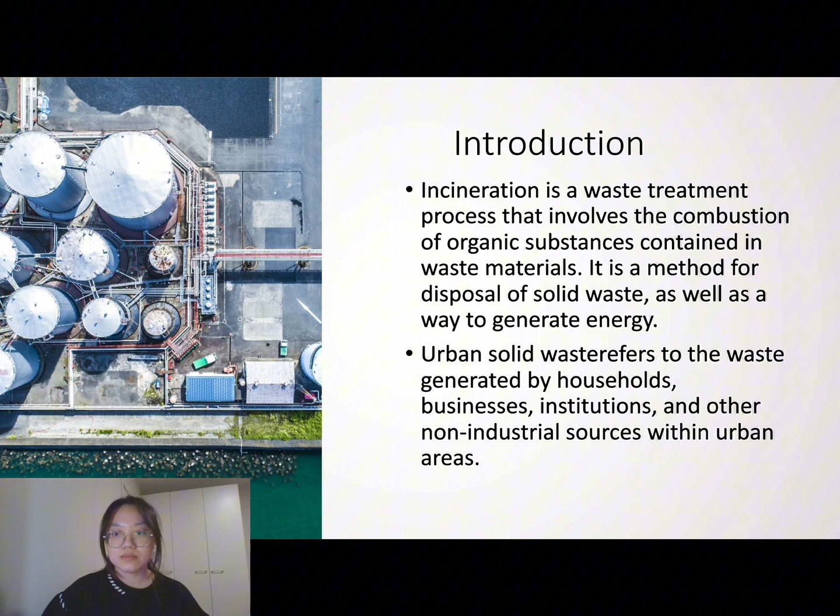After collecting urban solid waste through various channels, recyclable and harmful waste are separated, and the remaining waste is transported to the incineration treatment site. Before incineration, further treatment such as crushing is carried out to optimize combustion and improve energy recovery efficiency.

Sufficient combustion is carried out in the incinerator, and the generated heat heats the water in the boiler to produce high-pressure steam. The steam is then directed to the turbine to generate electricity using its rotational energy. Some facilities can capture and recover additional heat from the flue gas, which can be used for regional heating or

other industrial applications. The pollutants generated during the incineration process will also be captured and treated. The remaining non-combustible materials after incineration will also be further treated or buried in landfills.

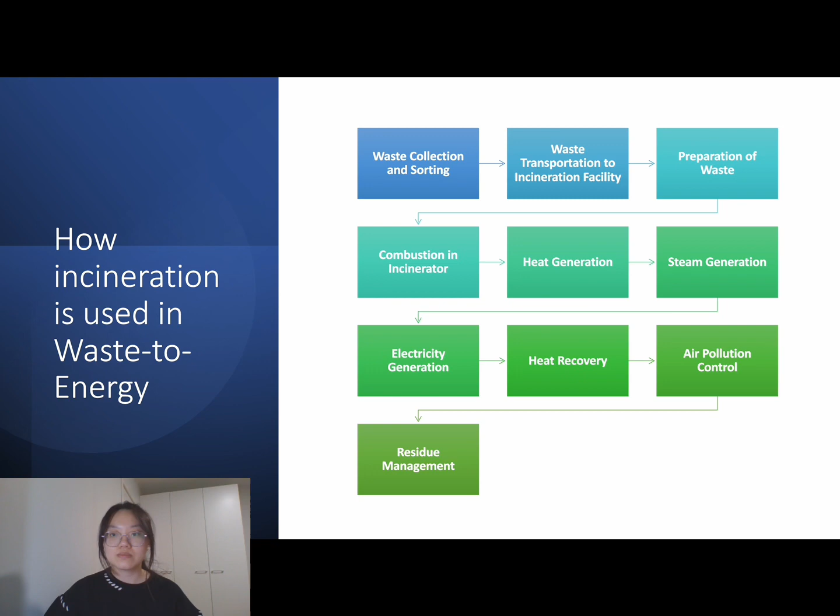The impact of incineration technology on waste recovery rate is complex and depends on specific circumstances. If waste incineration is considered the main method of waste treatment, then recycling may not be given as much importance. If a large portion of the waste is directly incinerated, the materials available for recycling programs may be reduced. The government's policies and investments in waste management infrastructure will also affect the balance between incineration and recycling.

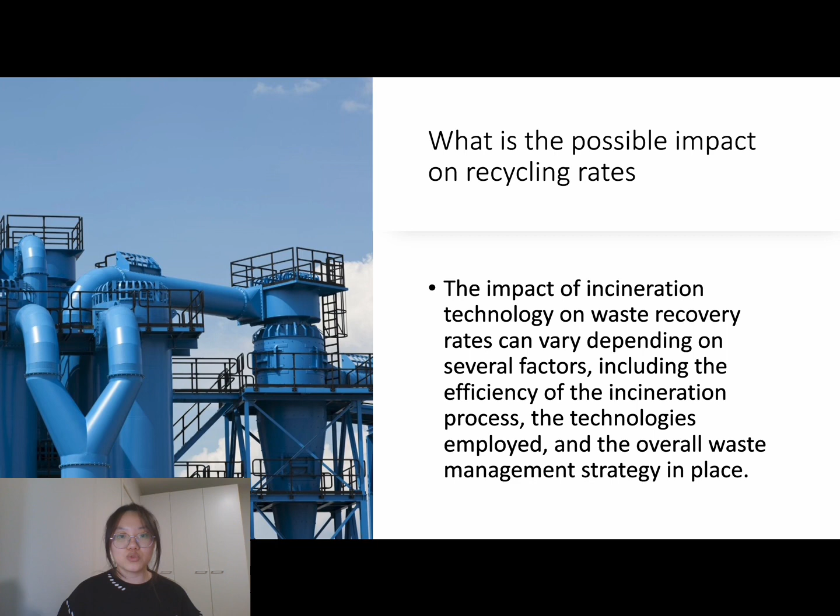Incineration technology has a wide range of applications and can be applied to various types of waste. Incineration is a common method for managing urban household waste, as it reduces the volume of waste, minimizes the demand for landfill space, and can generate energy. The combustion of biomass can generate heat and electricity, and the resulting ash may have agricultural applications.

It can be used for safe disposal of contaminated waste from hospitals or labs. It can be used to incinerate harmless industrial waste such as paper and wood. It can be used to handle certain types of hazardous waste, such as waste oil and solvents. The sludge from sewage treatment plants can be incinerated to reduce its volume and generate energy.

Although traditional incineration may not be suitable for e-waste, as it releases potentially harmful substances, some advanced technologies, such as waste incineration with integrated gas cleaning system, can be used to manage certain components of e-waste.

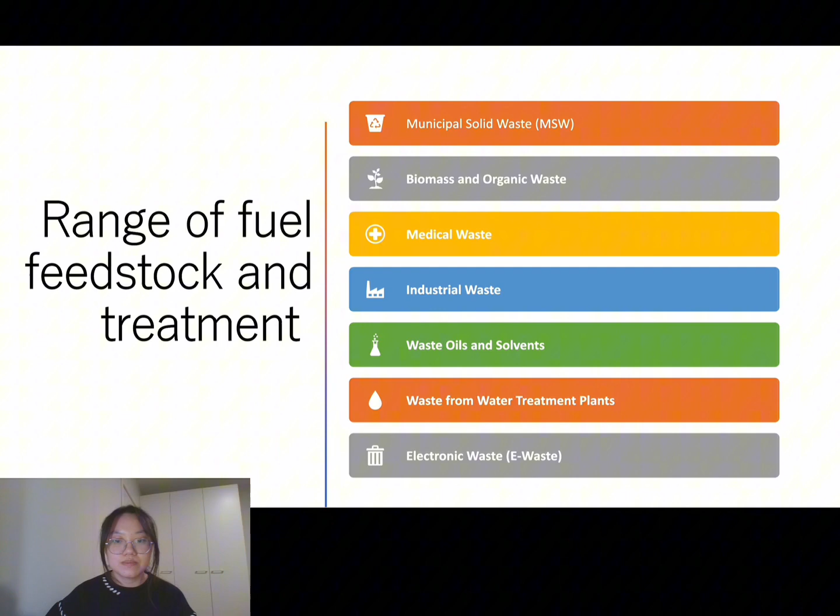The selection of boiler technology during the incineration process is a complex decision that requires consideration of specific waste characteristics, regulatory requirements, energy recovery goals, and environmental factors. There are many different types of boilers, each with its own advantages and applications, and we should choose the most suitable type according to its requirements.

In the context of waste incineration, boiler technology plays a crucial role in converting the heat generated by waste combustion into steam. The higher the efficiency of steam generation, the higher the energy recovery rate. Then steam can be used for power generation or to provide heat for industrial purposes.

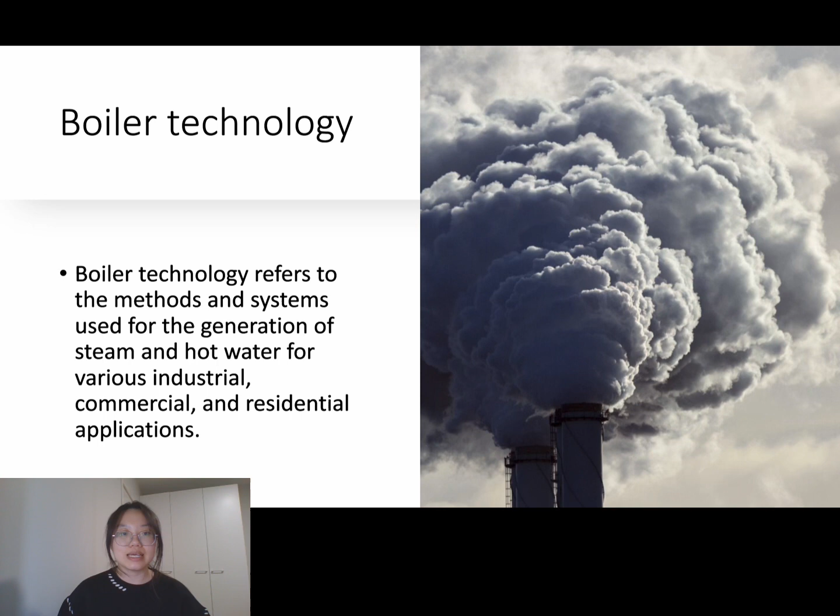Then we are going to talk about the challenges and solutions for emission control. Here are 3 points about the challenges. Firstly, the emission of harmful substances such as dioxins during the incineration process is difficult to control and poses a threat to the environment and human health.

Secondly, the control of parameters such as temperature, oxygen concentration, and incineration time during the incineration process is difficult and requires high-level technical and equipment support. Last one, both exhaust gas treatment and waste residue treatment during the incineration process require a lot of energy and capital, resulting in high costs.

The current solutions to these challenges mainly include the following: adopting advanced combustion technologies such as high-temperature combustion and low-nitrogen combustion to control parameters such as temperature and oxygen concentration during the incineration process, reducing the production and emission of harmful substances.

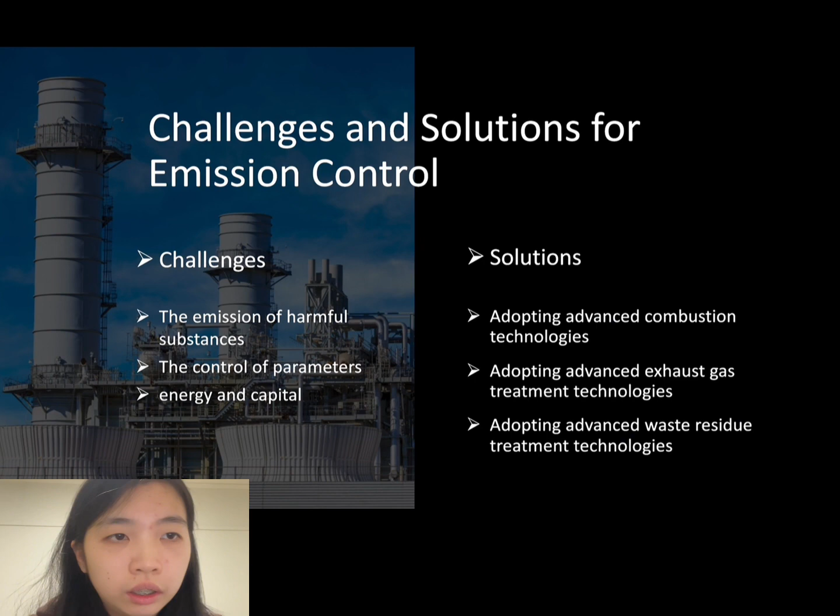Then adopting advanced exhaust gas treatment technologies such as activated carbon adsorption and catalytic oxidation to treat harmful substances generated during the incineration process, reducing their impact on the environment. Then adopting advanced waste residue treatment technologies such as solidification and stabilization to treat waste residue generated during the incineration process, reducing their impact on the environment.

Next, about the waste disposal. The main method of waste disposal of ash includes solidification and stabilization techniques. Solidification involves mixing the waste residue with a solidifying agent to form a hard solid under the action of the solidifying agent, reducing the volume and stabilizing and rendering the waste harmless.

Stabilization involves adding chemical agents or physical methods to convert the harmful substances in the waste residue into stable compounds, reducing the release of harmful substances and stabilizing them. The treatment of byproducts after waste disposal mainly includes resource utilization. For example, ash can be used to produce building materials such as cement and concrete and can also be used for road construction.

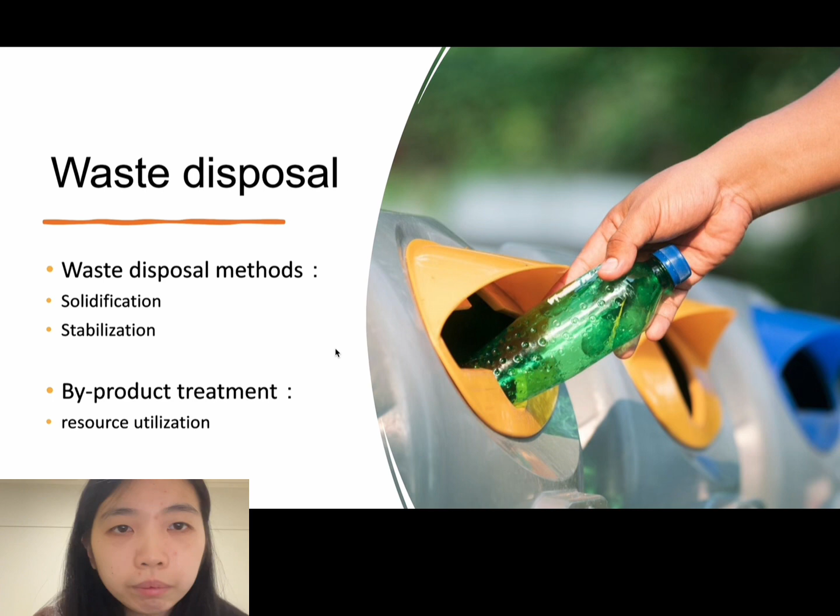The importance of waste classification lies in its ability to help us better manage and dispose of waste, reduce environmental pollution, and improve resource utilization. Two main waste categories can be established based on the distinct legislation and policy instruments usually in place: non-hazardous or solid waste, and hazardous waste.

Non-hazardous is all waste which has not been classified as hazardous: paper, plastics, glass, metal and beverage cans, organic waste, etc. While not hazardous, solid waste can have severe environmental and health impacts if left uncollected and untreated. Hazardous waste is waste that has been identified as potentially causing harm to the environment and human health, and therefore needs special, separate treatment and handling.

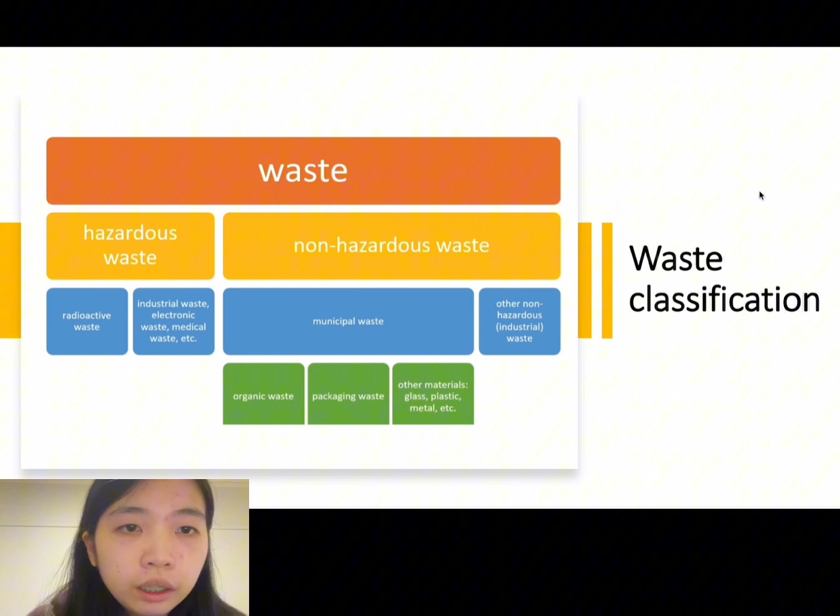E-waste is generally classified as hazardous because it contains toxic components. Medical waste can be infectious, toxic, or radioactive, or contain bacteria and harmful microorganisms. Radioactive waste contains radioactive materials, so it is all hazardous waste. We know the principles of garbage disposal are harmlessness, reduction and resource utilization.

The main methods of harmless treatment of domestic waste in various countries around the world include landfill, composting, and incineration. Among them, domestic waste incineration power generation is a new technology developed in the past 30 years. Compared with landfilling, it can save a lot of land resources, reduce possible secondary pollution, and convert waste into energy resources. It has therefore increasingly become the main method of waste disposal in some developed countries.

Among the harmless treatment methods of domestic waste, waste incineration power generation has the advantages of saving space, significant reduction, more thorough harmless treatment, and conversion into energy. It has attracted more and more countries' attention. The proportion of waste incineration power generation is increasing year by year, and it will become an important direction of new energy development in the future.

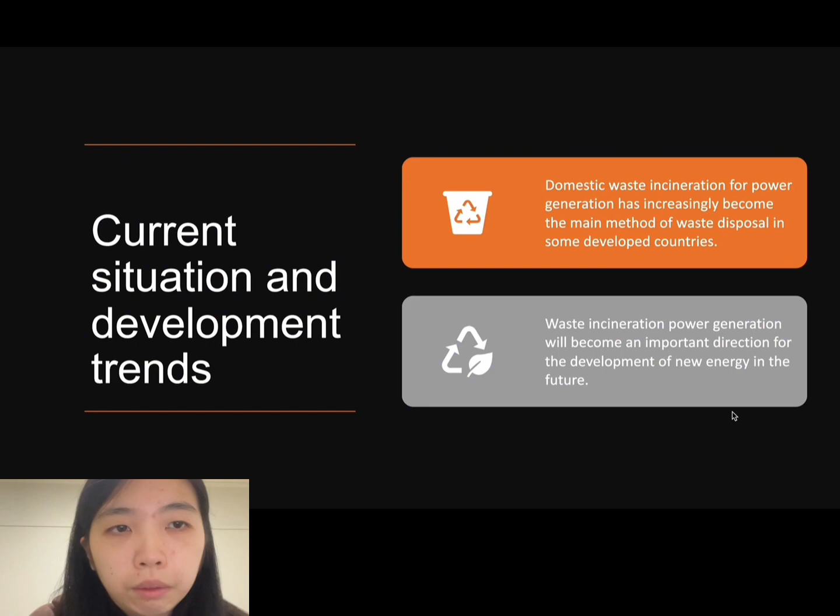The efficiency of energy recovery and incineration technologies for power generation is also an issue that deserves our attention. There are a huge number of factors that can affect it, and I have listed some of them. First of all, the moisture content of waste. Waste with high moisture content consumes more energy when burned. It will reduce combustion efficiency.

And the choice of fuel and its degree of combustion. The more fully the fuel is burned, the more efficiency it will produce. The choice of fuel is also critical, and if the fuel chosen contains a high level of contaminants, the operation of the generator will also be impacted. Exhaust gas treatment systems.

Effective exhaust gas treatment systems can reduce emission levels and improve energy recovery efficiency. The above 3 points are mainly in the incineration process, and the recycling of waste residues after incineration can further improve the energy recovery rate, which is also a point that should not be ignored.

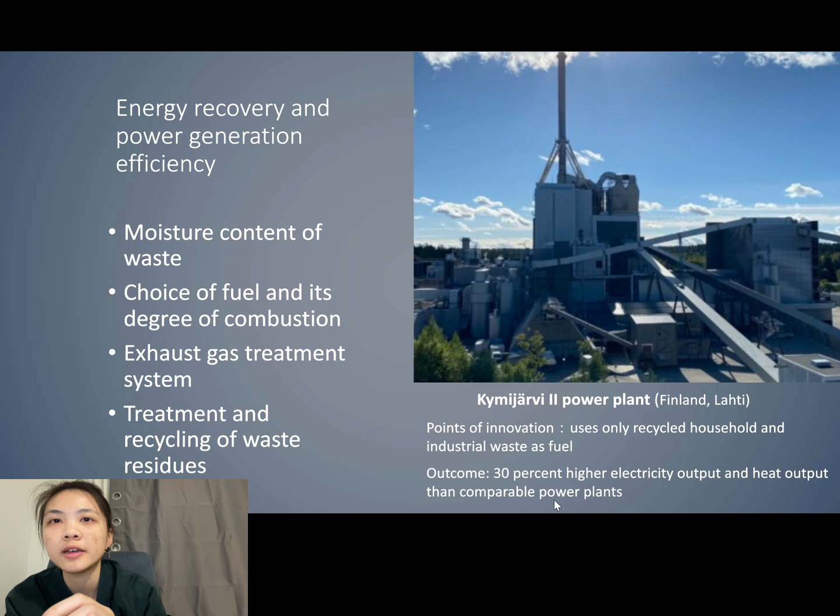To improve efficiency and be more environmentally friendly, factories can improve their technology in 3 ways. To start with, enhance waste pre-treatment technologies. Industry can remove the impurities in the waste in advance that may cause harm to the equipment. Then, during the process of incineration, some intelligent control system can be used for more precise controls to improve efficiency.

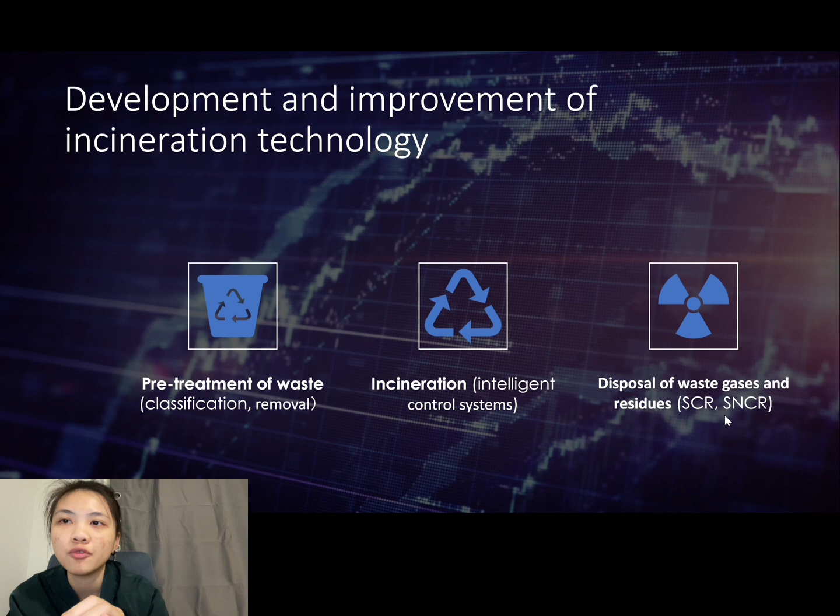After incineration, proper disposal of waste gases and residues can be used to reduce the influence on the environment, such as SCR and SNCR, which are both able to reduce the emission of nitrogen oxide.

It cannot be ignored that incineration also has a certain impact on the environment. We can explore its impact from 3 aspects: social, environmental, and economic. First, we start with the environmental side. There will be air pollutant emissions and the generation of waste residues in the incineration process. This will affect air quality, and it will also cause water contamination due to improper disposal. So, it is not in line with SDG 6, clean water and sanitation.

At the same time, the incineration process is fueled by several organic wastes that are renewable energy sources, in favor of SDG 7, affordable and clean energy, which aims to reduce dependence on non-renewable energy sources.

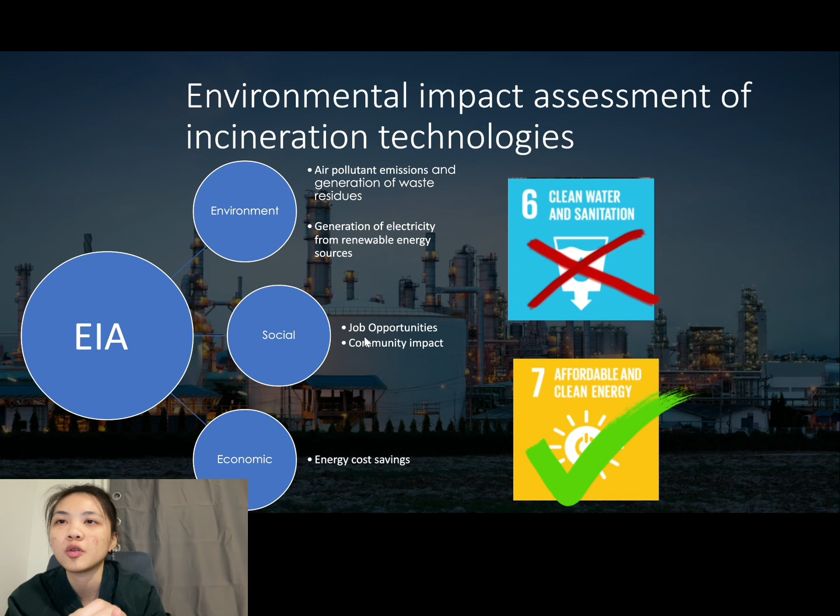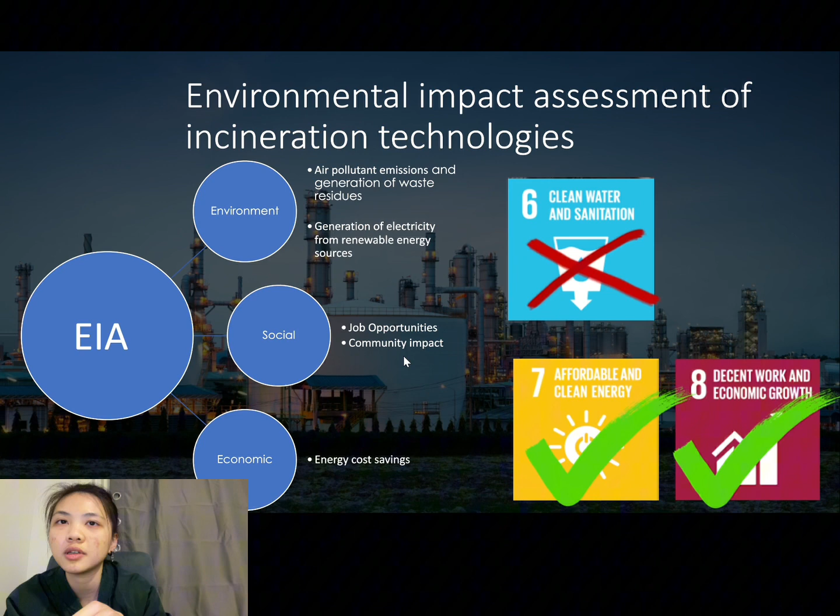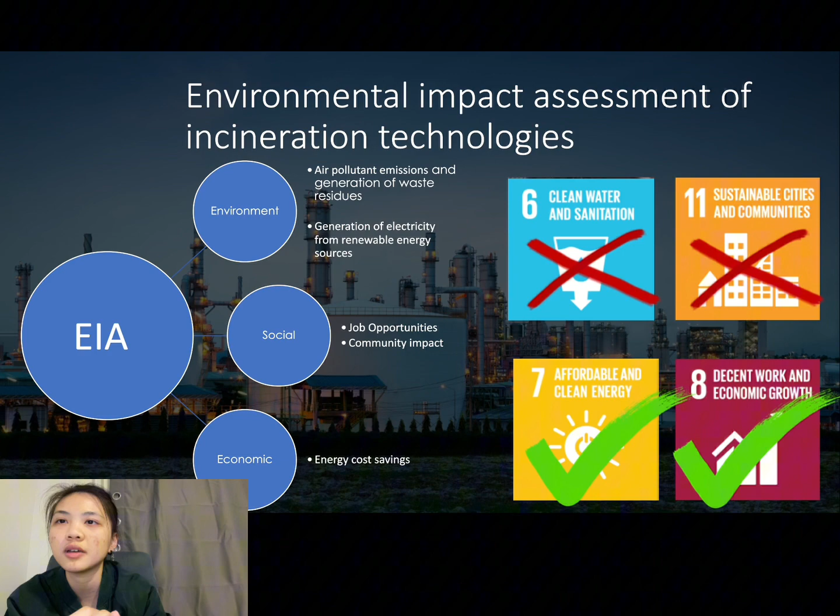Socially, the operation of the incineration plant provides jobs for the local population, in line with SDG 8, decent work and economic growth. At the same time, it also has negative impacts on society, such as generating noise pollution and placing a burden on local traffic, which is not in line with SDG 11, sustainable cities and communities. On the economic side, incinerating waste to generate electricity saves energy costs and favors the local economy.

Finally, we conducted some surveys on the public perception of incineration, which is seen by organizations such as Zero Waste Europe as destroying the value of the waste, with recycling as a better way than incineration. However, proponents of incineration believe that the purpose of incineration is to dispose of waste products that are not suitable for recycling, and therefore it does not contradict recycling.

It has been shown that the countries with the highest waste incineration rates, Denmark, Norway, and Sweden, for example, all incinerate at least 50% of their waste, and also tend to have higher rates of recycling and composting of organic materials and food waste. Therefore, to increase public acceptance of incineration technology, governments should improve information transparency and communication with the public as a way to better implement incineration technology.

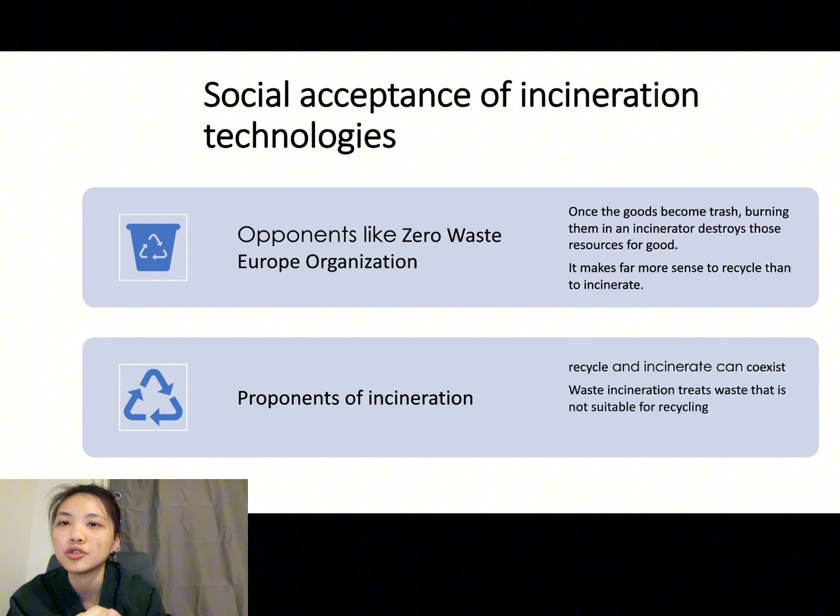In conclusion, urban garbage is a long-term source of pollution, and if untreated or improperly treated can cause serious pollution problems. Incineration technology is a way to achieve the transformation of waste into energy, addressing issues such as the continuous deterioration of urban environments caused by the high growth rate of urban solid waste and the increasing phenomenon of garbage surrounding cities. In order to improve the environment and the society, innovative technology for different stages of incineration should be developed.

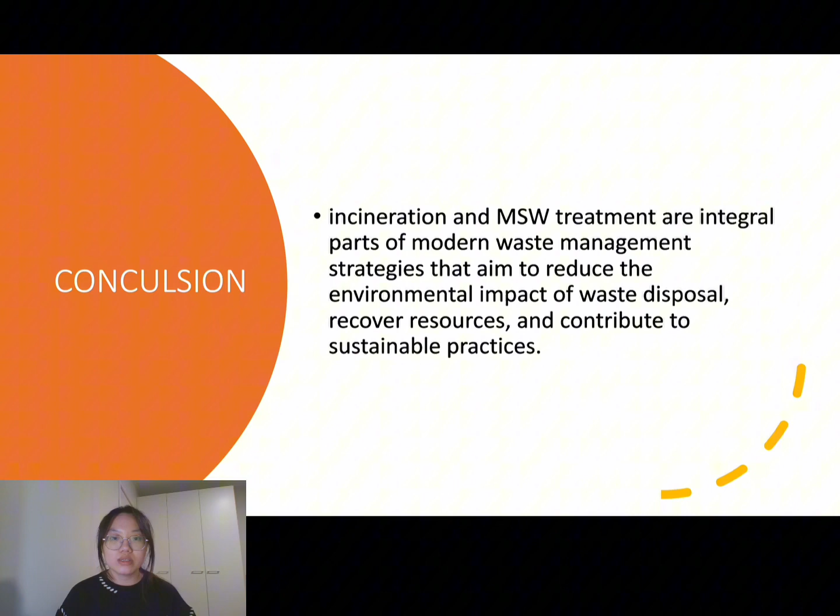Policy transparency should be strengthened to increase people's acceptance. Incineration technology still has two sides, and more comprehensive policies need to be formulated to further develop it, in order to adapt to more diverse needs and reduce adverse effects to a certain extent.